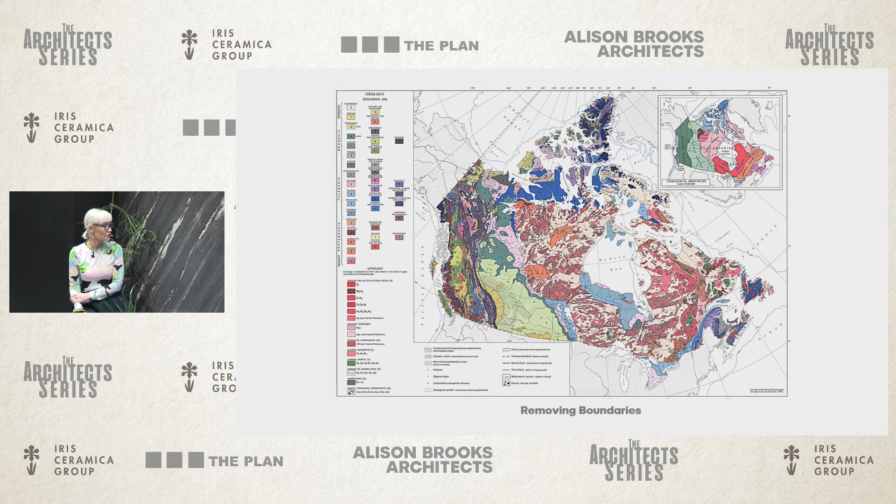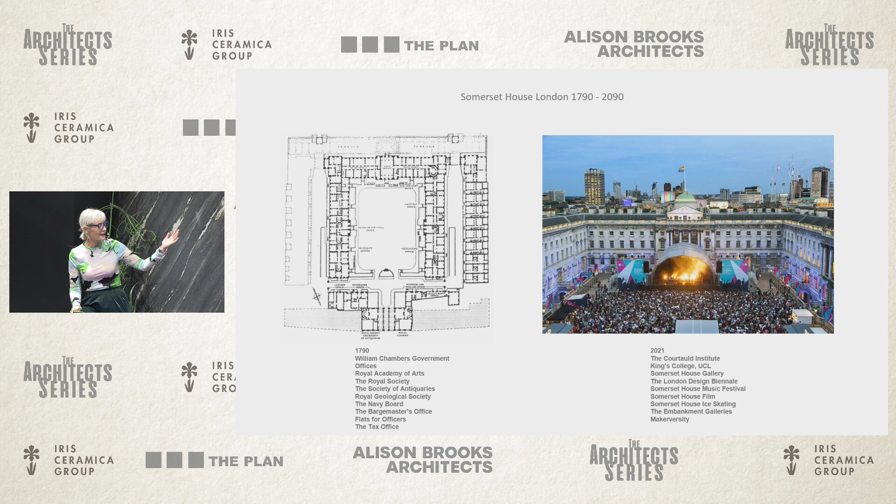So these kinds of places have informed and inspired me, kept me in London, places like Somerset House, which has evolved from 1790 to 2021. We held our office 21-year anniversary party at Somerset House - that's not the party, but it will be the party we have one day.

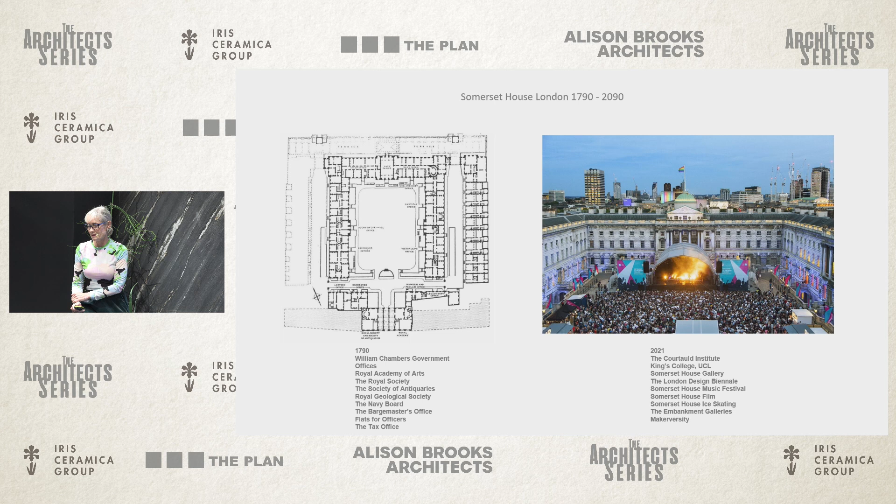That's the festival that they hold in the summer. But it's this kind of adaptable architecture that's generous, robust, and is loved, and is a kind of sustainability that we also need to aspire to.

So we published a book in 2017, Ideals Into Ideas, and this is also underpinning principles for the practice. We're aiming for authenticity, generosity, civicness, and beauty in all our work. These are, in a way, part of this wider project to respond to context, to bring our ideals to the table, and bring together memory with the future.

And I think that's, in a way, what the architect's role is: to tap into those meaningful experiences, tap into place, and bring it into the future. And this is also the notion that architecture should be about storytelling.

It's about making the stories and histories and collective memory of communities legible and visible. So as a practice, we really focus on four principal areas of design: master planning, buildings for education and the arts, housing, mixed-use urban developments, and then as a counterpoint, private houses that are a way of keeping our hand in on the real making of buildings.

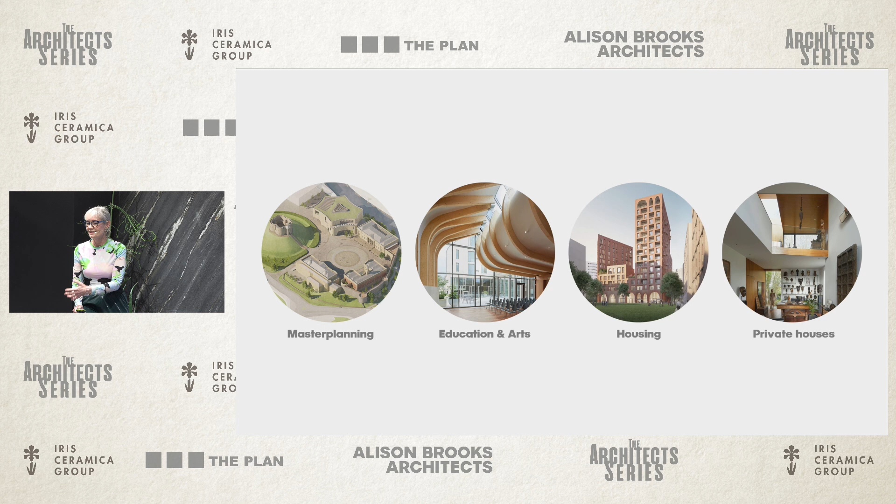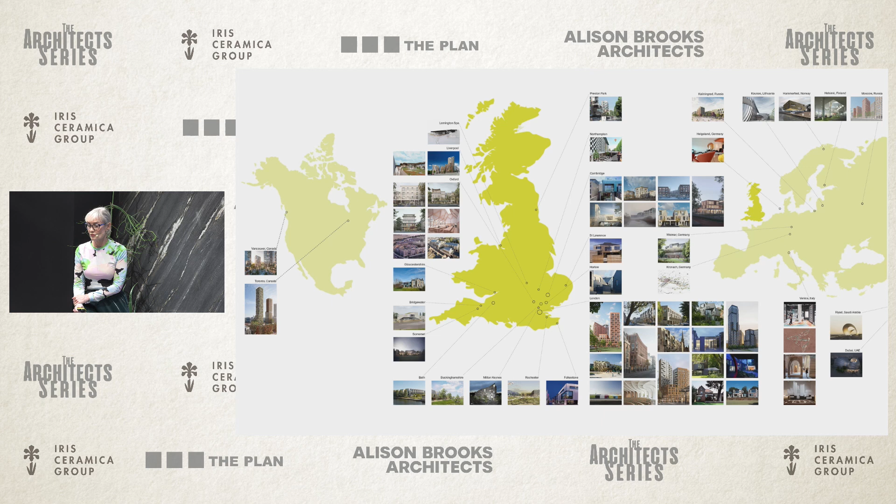Our work has spread over the years, so you can see it's primarily concentrated in the UK, but also a couple of projects in Canada. And as I mentioned earlier, we're working now in Taiwan, Sweden, and France, and it's really amazing to be able to experience these places and respond to them.

But the office is not just about work, it's also about a kind of practice culture, and we go on trips to places like the Venice Biennale or to the north of England, to Porto, Barcelona, Lille, and try to create that shared experience that informs our work and inspires us.

And we also exhibit, not only at the Venice Biennale, where we've exhibited four times, but also in other venues around the UK and Europe.

And we also have a sustainability working group in the office that actually develops all of our policies and targets, and tracks developing guidance in terms of sustainability policies, also from our clients.

And here you can see our ambition to basically reduce embodied carbon and operational carbon in line with, and exceeding, government targets up until 2040.

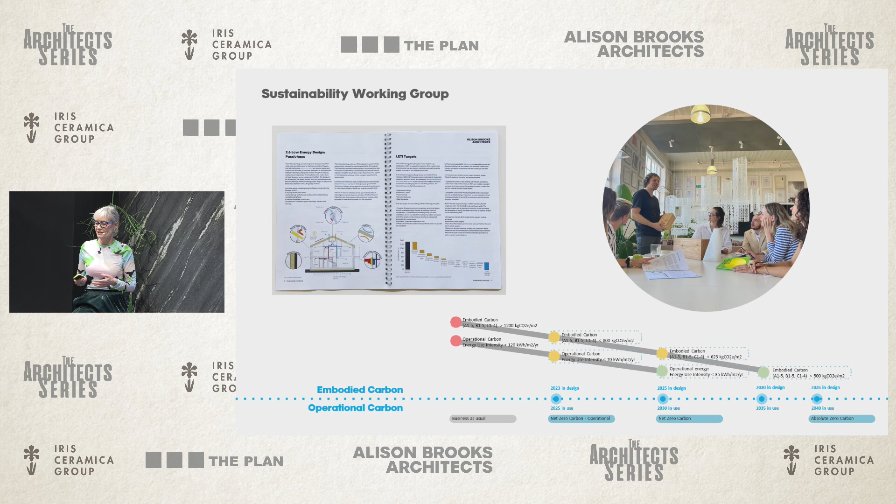But of course, we need our clients and society as a whole to go along with us. But it is now our duty, as I think all architects feel very strongly about at the moment.

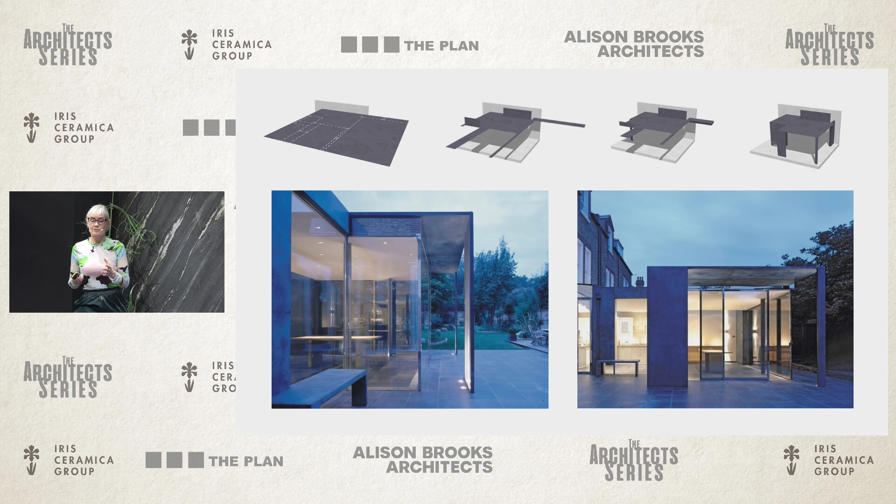So to go back a little bit farther in time into the origins of the work, of the practice, it's really this question that I had when I first started working with very small projects at the beginning of my practice in 1996, 97, and it was this question: what can architecture be?

Can architecture be just one material, like in the fold house? Can it be a single plane of metal that you cut and fold and it becomes a roof, it becomes structure, it becomes furniture, it becomes sunshades, trying to reduce it to its elements?

And that language kind of evolved into a more organic, non-orthogonal language that was more about evolving the bay window, a very familiar architectural element, into something more sculptural and plastic with the Lens House.

And then the Windward House, which was a sort of culmination of many years of working in this organic language. And the darkness of Windward House and its informal geometries were inspired by the Forest of Dean, trying to bring this quality of landscape into the experience of space.

But also make it a great place for the owners to cook and share the place with their friends, and also share it with their collection of tribal African and Indian art.

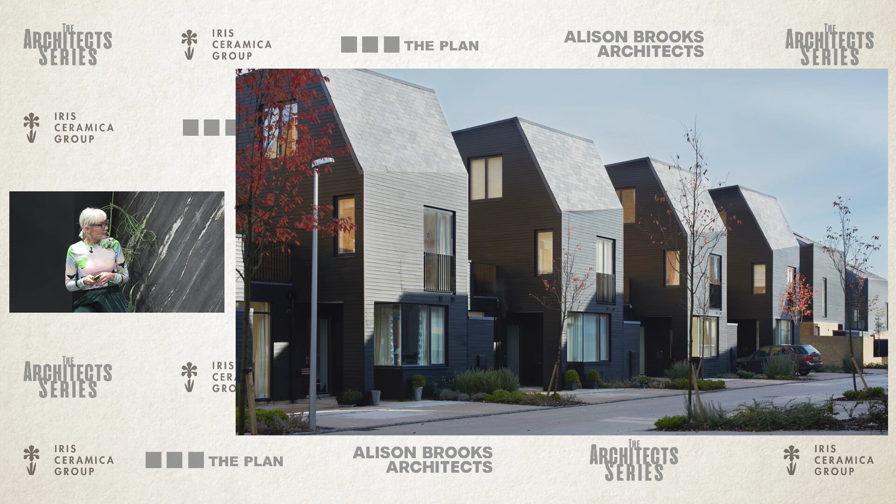And then I took those experiments in housing, in private houses, and tried to bring them into housing and even developer housing, house builder housing, and that's what Newhall Be was, a large-scale experiment where I was trying to make a sort of land art with housing, using those kind of organic geometries that I'd experimented with in houses.

So that project, in a way, leads to a more recent project that I've described as embracing global narratives. And this was the competition for the London School of Economics Global Hub and the Institute for Africa.

And it's here. The site is here. And we were shortlisted from, I think, 160 international submissions down to the final 5.

And this is a tricky problem because there is an existing building there, and it's very complex, very badly built, very low ceilings, not a great building. You can see from this image here.

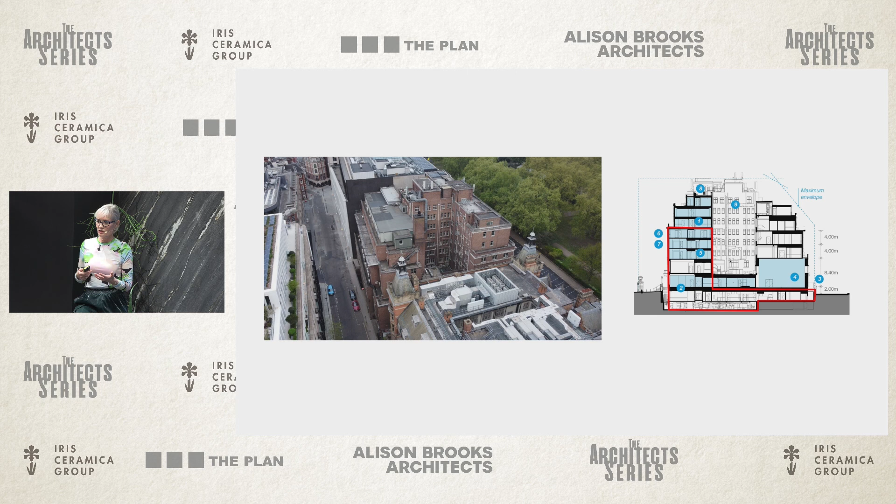And this project became the sort of crux of the debate about retention or demolition, and how much of buildings like this can you and should you save. But aside from that, there's also the kind of cultural project of the competition.

I felt that as an international institute and the global hub for Africa, we should really team with an African practice. So we invited Studio Contra from Lagos, Nigeria, to join our team, and we worked together on the scheme.

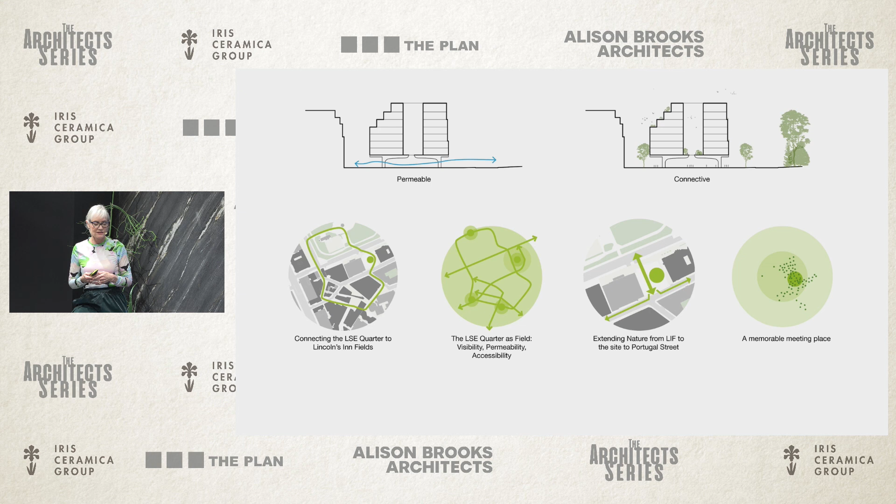It's a kind of urban design project, as most architecture is. It's about creating a new place of connection, making the LSE campus more permeable, extending nature through the site, lifting the building and making its public floors accessible.

This is a window into our process of modeling, with very strict rights of light envelopes and many different iterations in terms of how to create a fully naturally ventilated 60,000 square meter, very hardworking, multi-departmental building. In the bottom right, this stepped massing is what we arrived at.

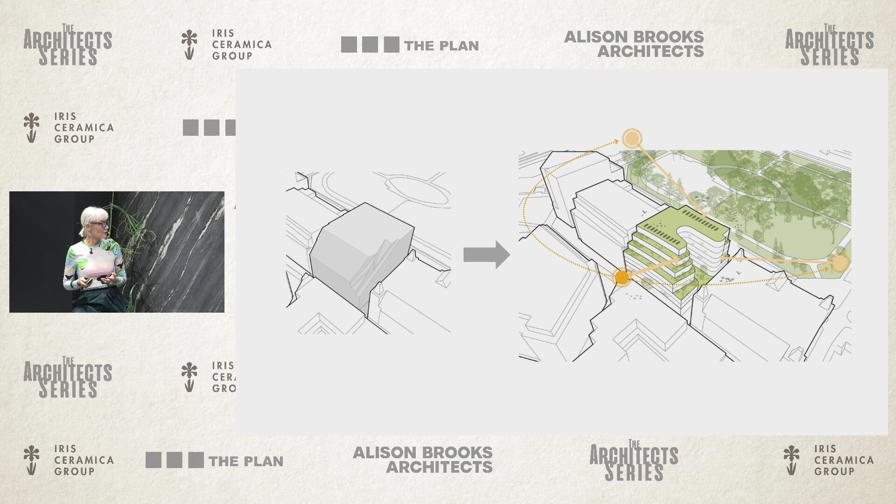The sustainability of this project was critical in terms of operational carbon and embodied carbon, with openable windows for every office. We also developed, one of the key elements of the brief, an agora - a publicly accessible forum for debate and performance that would be visible from the street.

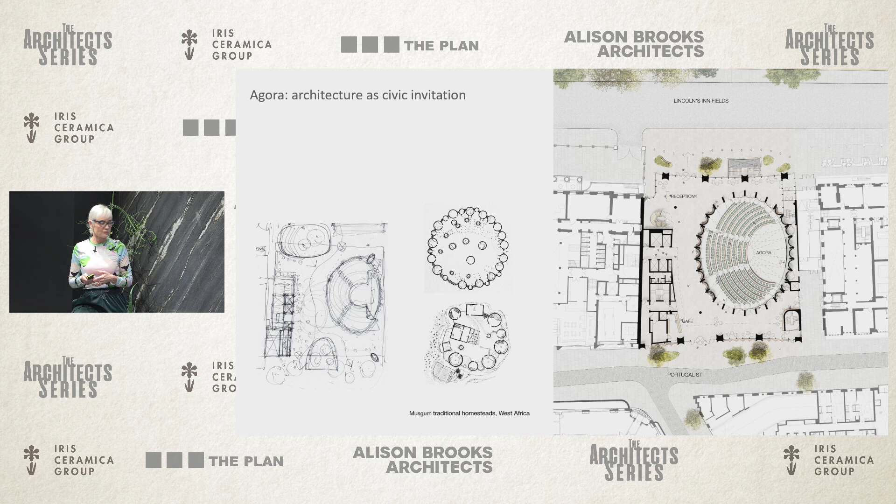Our agora, which is inevitably a long-span structure for 350 people, means you have to do a lot of work to the existing building, demolishing and rebuilding a lot. But our language, both for the gathering spaces, was inspired by West African traditional forms of gathering - the circle, clearly.

Our proposal involved creating this large span hall, this auditorium at the ground floor, using a courtyard structure to bring light and ventilation to the offices and the auditorium.

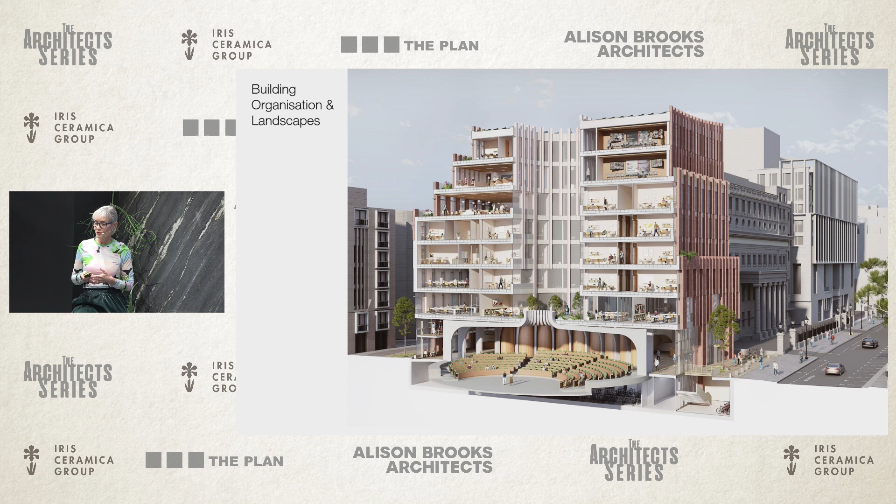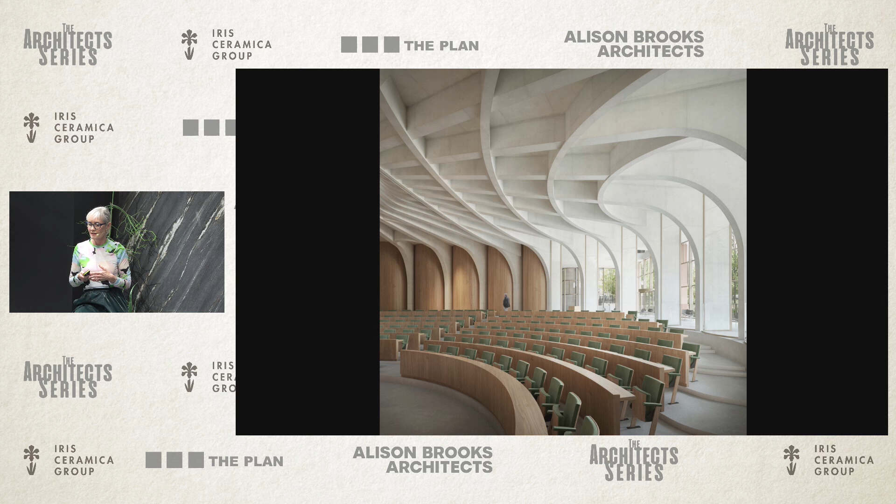Our intention was to create this space that would be both inviting - it could be opened or closed, creating an expressive structure that when open could be used by all the students and academics using the building, or it could be completely closed in like a UN-style auditorium, acoustically and environmentally separated.

In a way, our primary intention for this project was to bring a new language, new voices from Africa, from the global south, to the expression of a public building in one of London's major civic spaces. So the language we developed was really responding to the historic context of Lincoln's Inn Fields.

Of the Royal College of Surgeons next door - the color and texture, verticality, and even the chimneys. But we found in our research that traditional Hausa architecture, Iranian wind catchers, Musgum teleuks in Cameroon - there's a kind of shared language between African or vernaculars from the global south and a historic vernacular in London.

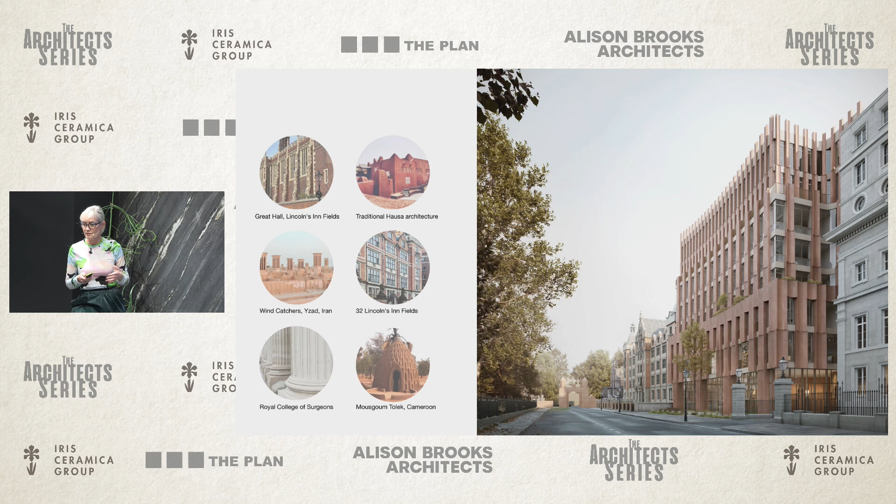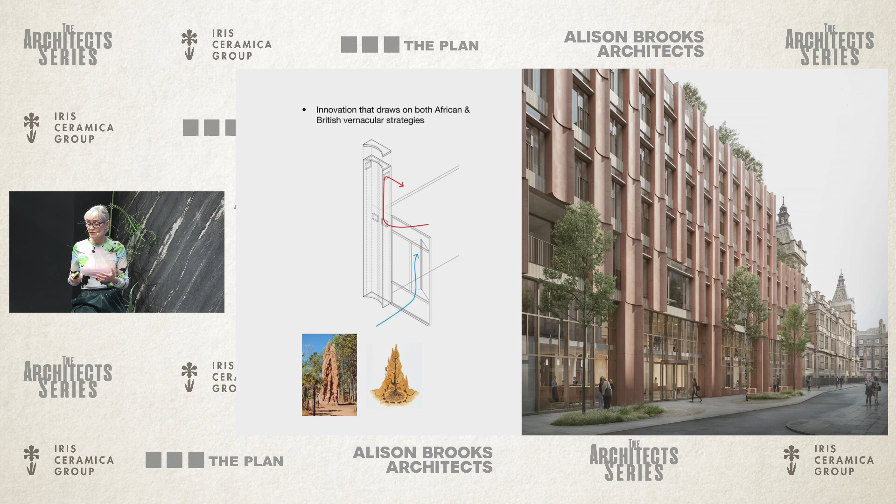This inspired our facade proposition, and this was also intended as a way of supporting the natural ventilation of each office by making the facade operate as thermal chimneys and shading devices.

This project, unfortunately, we didn't win. We were saving around 40% of the existing structure, but it went to the winner who preserved the existing building. I think what's important about this is it shows what our practice does in terms of research - we treat competitions as a form of design research, sustainability research, and it's all part of the conversation.

In the film we mentioned the idea of housing as civic building, and this is another mission we have - to really convince our clients who work in housing that housing is civic building, that it has a responsibility to the public, a condition of reciprocity.

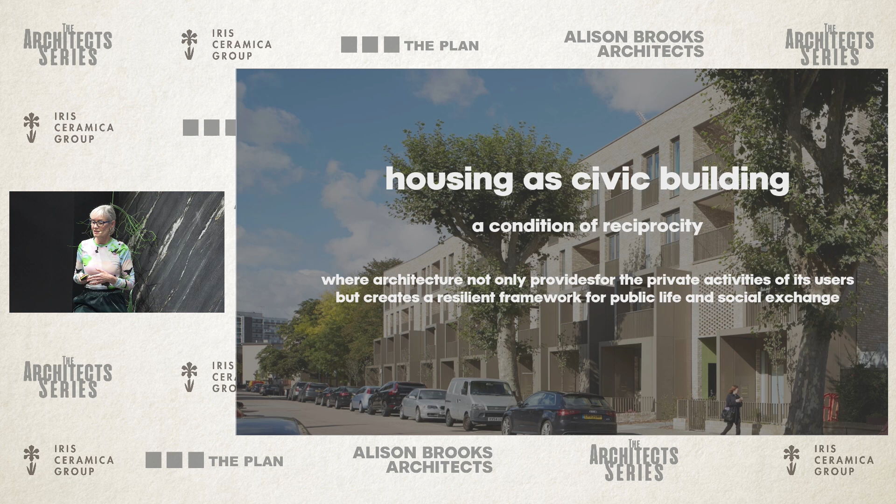You could say civicness is where architecture not only provides for the private activities of its users, but creates a resilient framework for public life and social exchange. So we've done many projects over the years.

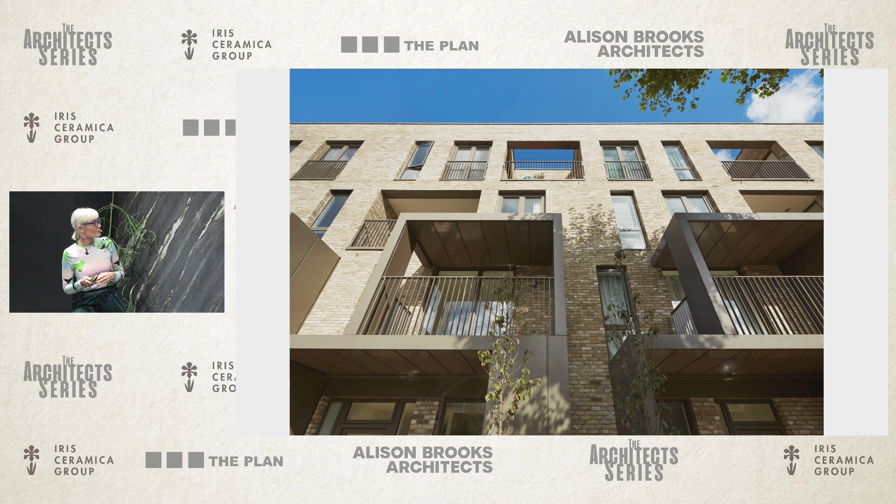This is estate regeneration work we did in the London Borough of Brent, restoring a former 1960s estate and a sort of abandoned land to a contemporary mansion block typology with verandas and deep inset balconies, landscape threshold spaces, and sheltered outdoor rooms to animate and create a social role for the facades.

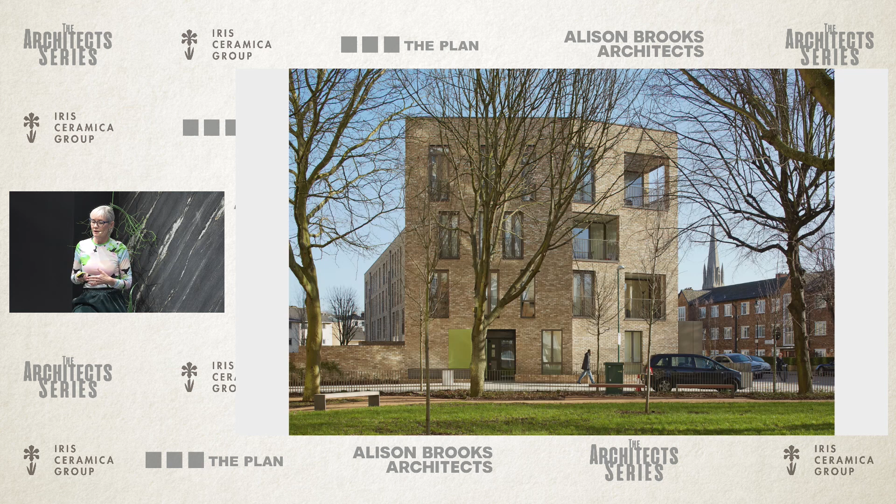You can see how it responds to the existing context and creates generous places in contrast to the bison block you can see in the distance there, which were really faulty buildings, oppressive, and symbols of the dysfunctional urban and architectural principles of the 1960s.

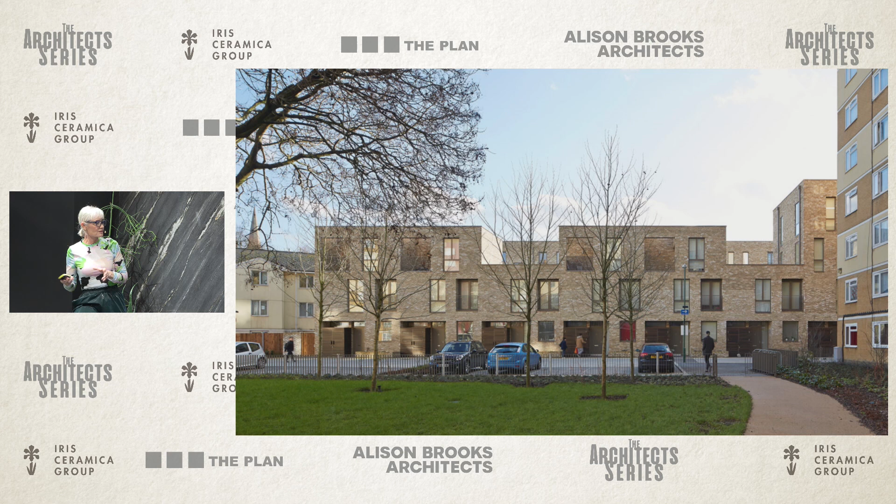But we stitched our scheme into the existing estate, and on the right you can see some of the buildings are being retained that are still performing well, creating this integration and mix of times and periods to create also shared public spaces. We exhibited this project in 2016 at the Venice Biennale.

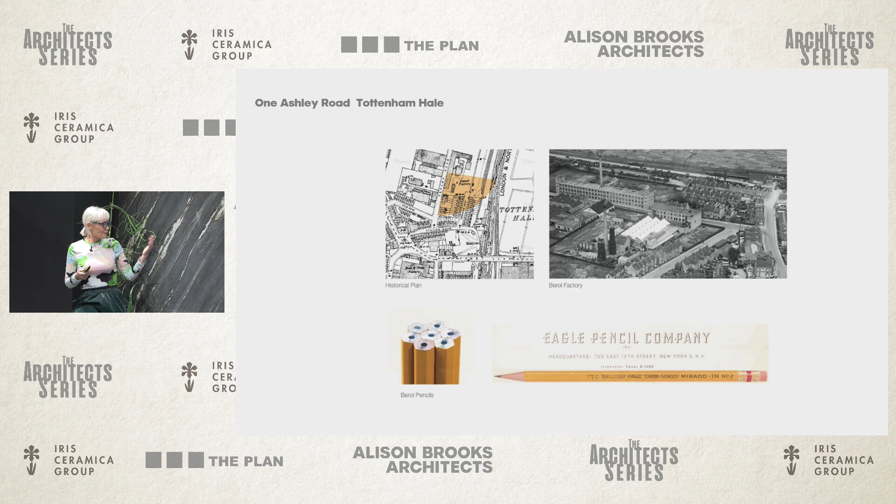We've just finished a project in Tottenham Hale called One Ashley Road, on the site of the former Berol pencil factory. Although most of the factory is gone, some of it still remains. We thought it would be interesting to draw on the iconography of the Berol pencil - the hexagonal plan form, the orange skin, the lead, the gray interior - and let that inspire the language for this building.

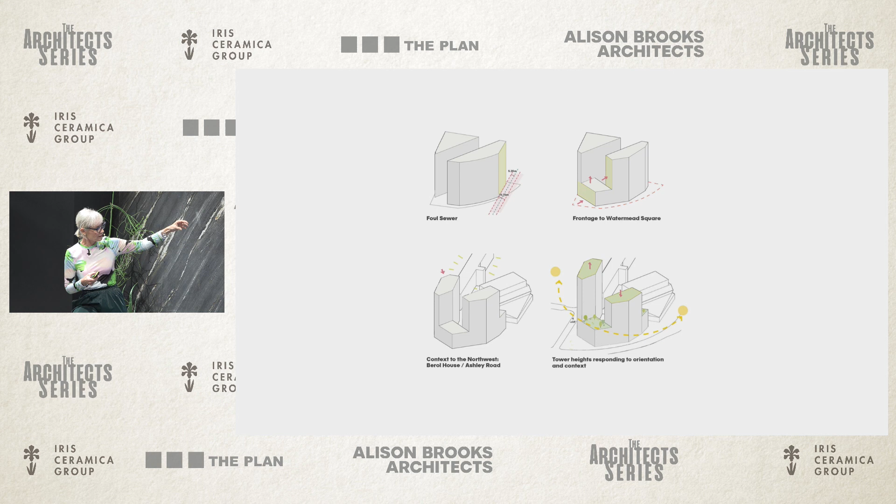It's also another project where we treat it as a kind of carving process, where the maximum developable mass is our starting point, and then we carve away where needed for spanning the Victoria line or bringing in light. We manipulate the volumes that emerge - this is another courtyard tower - to create an urban tableau with foreground and background and roof terraces, humanizing what could be a very dense cluster.

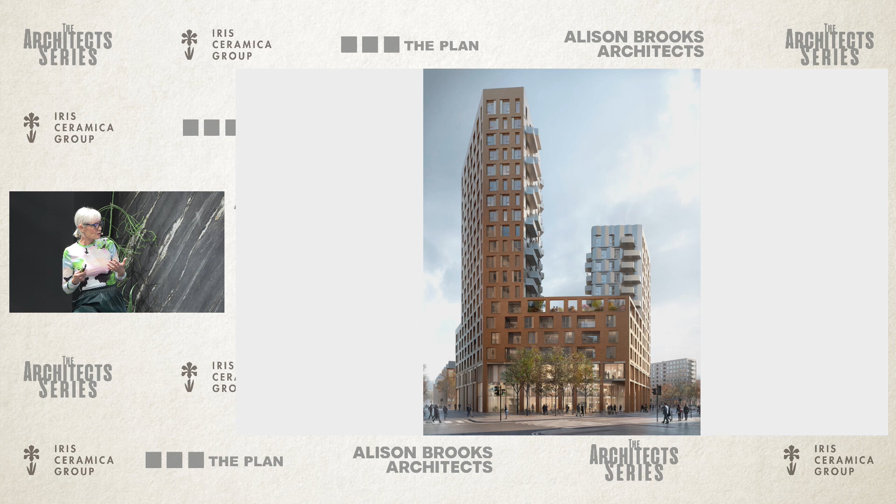This is the way it addresses and creates and frames a new public space, and there are residents' roof terraces on the interstitial garden levels.

Here you can see the inner skin, which is faceted and gray, with the outer skin in red brick, and patterned balconies that again build on the hexagonal geometries of the site.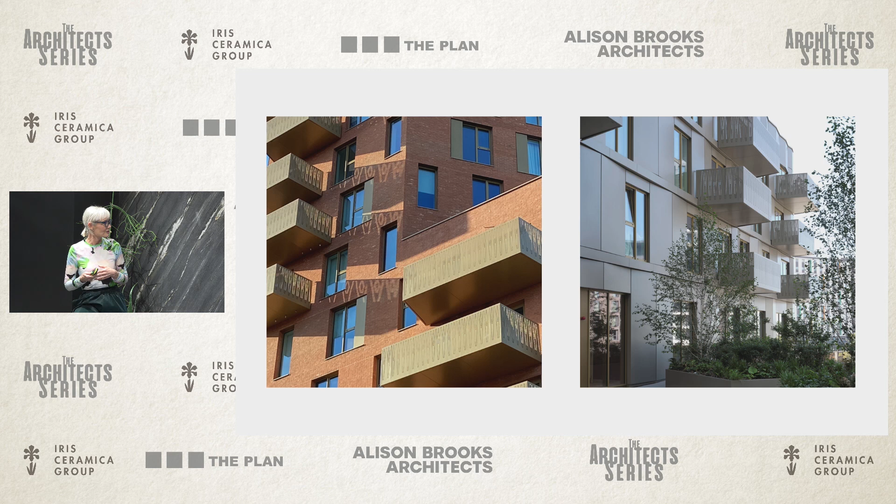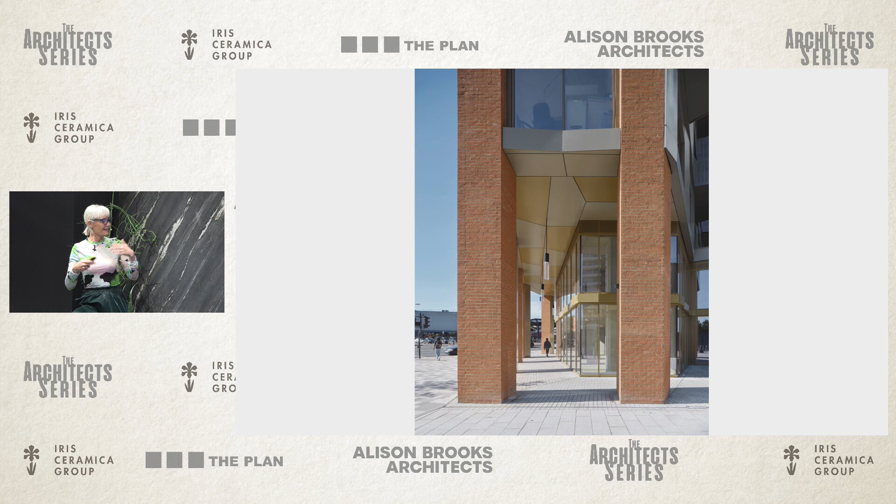These patterned balconies create shadows, a kind of patterned shadow - a sort of automatic ornamentation through light and shadow. We've also created a colonnade to filter the noise from the street and create a generous threshold space, a civic space that mediates the environment.

And here's the foyer, a triple height foyer.

Another project we're doing in East London is IQL, International Quarter in Stratford. This project is also about transforming the identity of a place. At the moment IQL is office-led, and Lend Lease, our client, wanted to turn it into a mixed-use neighborhood, introducing a residential element at the prow where it meets the Queen Elizabeth Park.

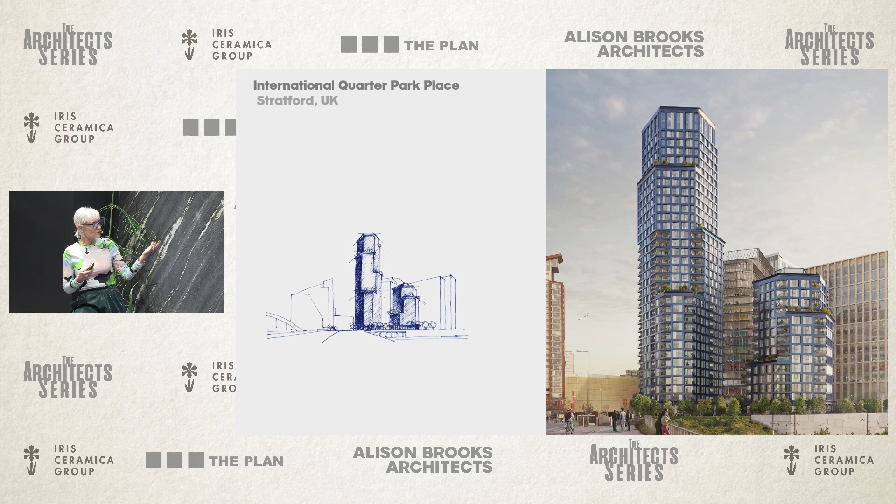Our idea was to work again with a hexagonal plan form, using rotations and stepping of the massing to bring nature up onto the higher levels of the building and create this generous colonnaded base, acting as a threshold from the park into IQL.

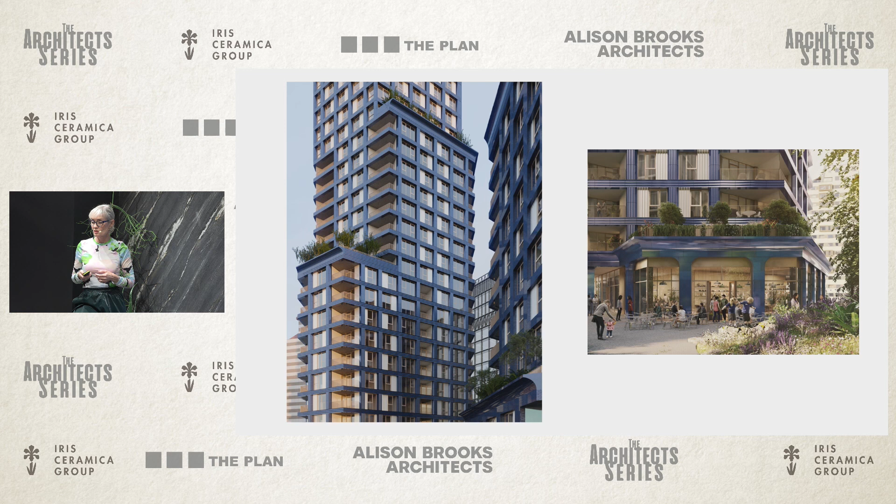This is the quality of landscape and the idea of immersing this new residential community in the park, bringing it closer into the way people will be living day to day.

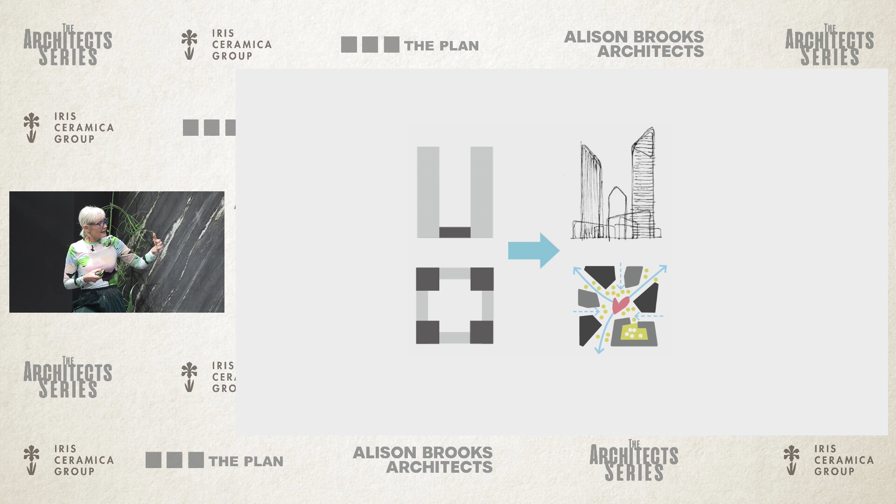Our proposal intentionally broke all the rules of development in Vancouver, which is generally the tower and townhouse model on the left that creates a sort of fortress of private space and kind of exclusion. We replaced it with a much more dispersed and permeable urban plan with six buildings that bring public space to the center of the site.

It's called The Passages, and you can see here the language we're working with to bring an organic and meandering relationship between the buildings, inviting the neighborhood into the center of the plan.

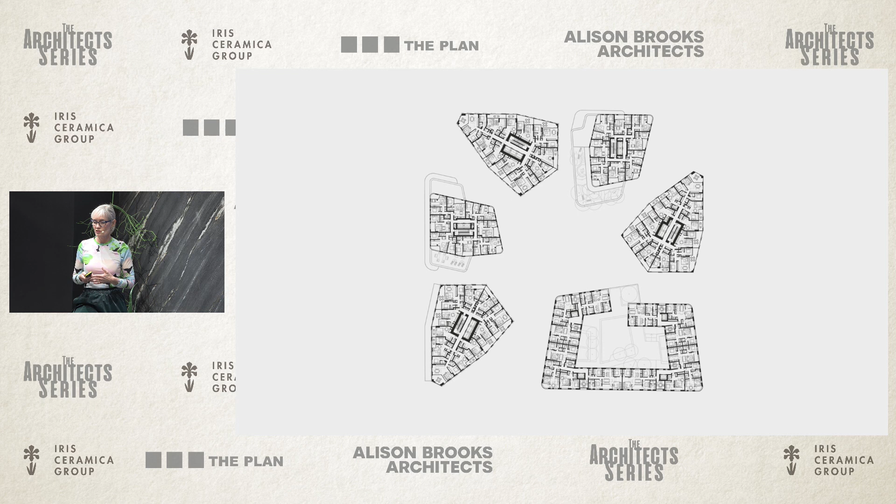The towers are very big in terms of their footprint, and they're working very hard, and we use this efficiency to pay for the generous public realm and public amenities distributed around all the ground and first floors.

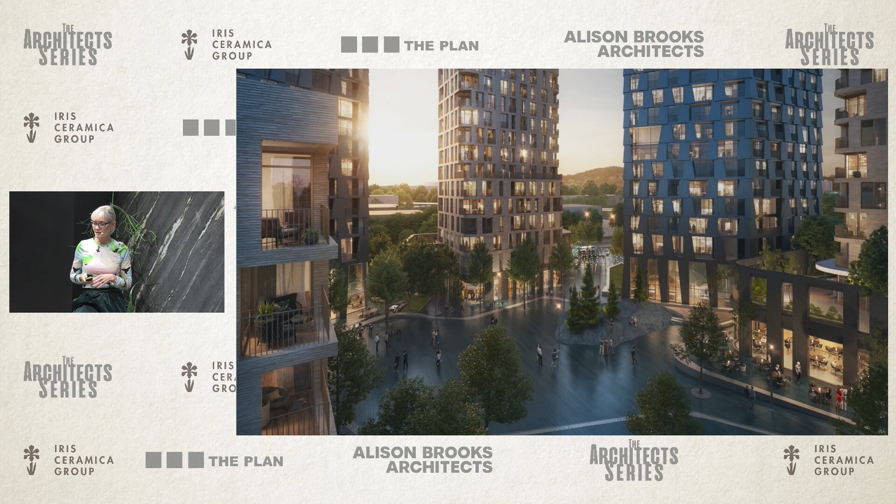This project was also inspired by the pine, fir, and cedar forests of BC, working with a language of shingles, bark, and a textured, shaded facade that is the opposite of the glassy towers of Vancouver. The public space at the center is about creating a particular identity of landscape that you could only find in BC.

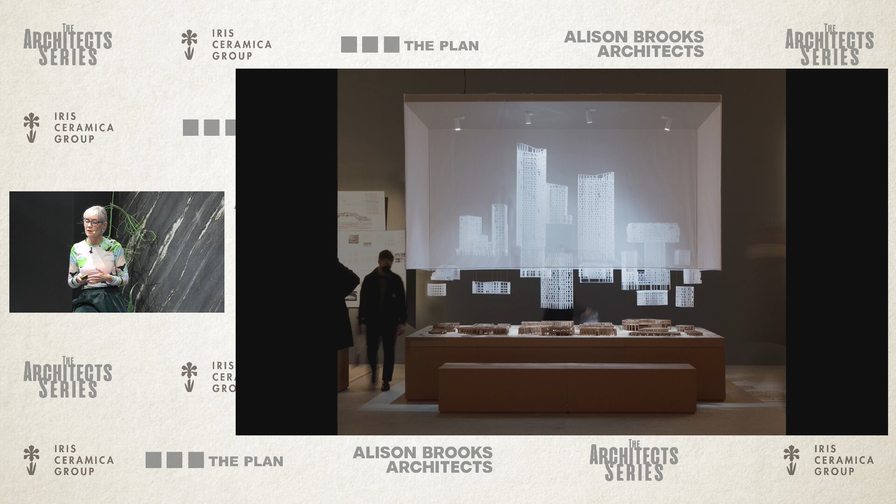All of these housing projects we brought together at the 2021 Venice Biennale in a project called Home Ground, where we gathered all of our housing projects and created a Campo Marzio, a shared space, exposing the ground floors of all our projects as part of the public realm, contributing to public life.

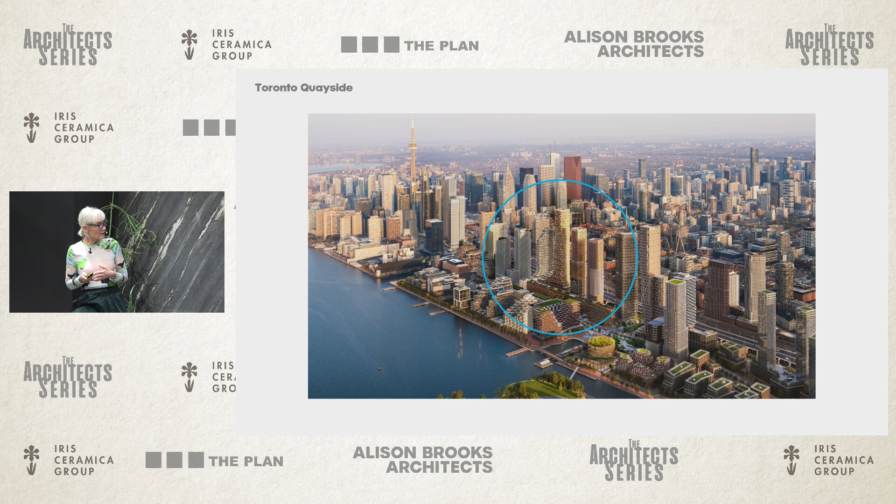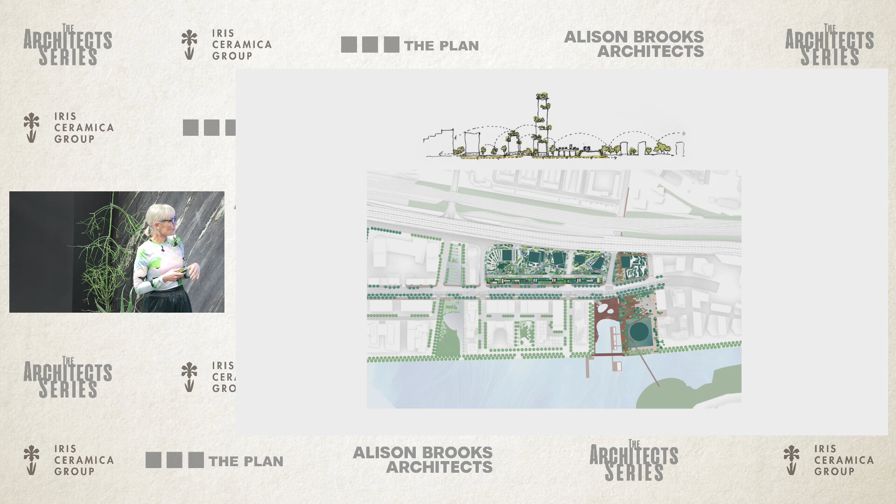The last big residential project I'll show is in Toronto—Quayside, a master plan we won in an international competition with two other practices. The idea was to bring nature to the waterfront, which is Lake Ontario and Toronto's waterfront, but there's a huge barrier formed by the Gardiner Expressway, Lakeshore Boulevard, and the Trans-Canada Railway at the north end of the site.

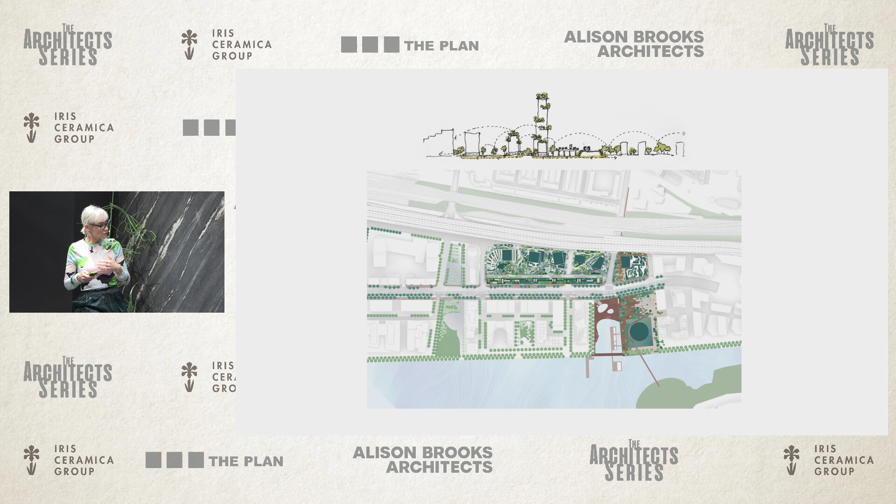Our idea was to enable nature to leapfrog these barriers and use the buildings as a kind of staging post to reconnect to the waterfront and kickstart a new waterfront ecology. These diagrams show our building—we're at phase 1, with phase 2 and phase 3 to follow, probably far into the future.

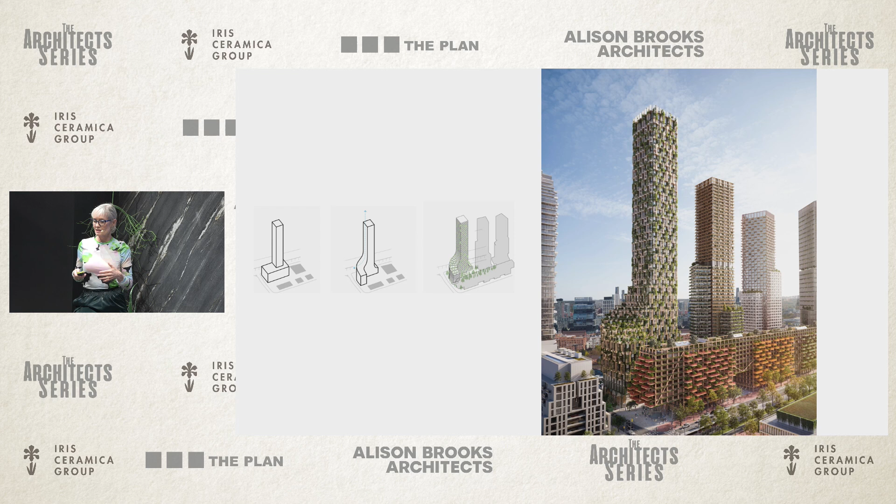Our idea for phase 1 was to rethink the tower-podium model typical in North America, integrating them into a single form with a curved plan—pulling the tower from a curved base that forms a sheltering courtyard and public space, then enveloping the tower with balconies and trellises, a facade where residents could grow significant numbers of plants, since the balconies are generally two stories high, allowing for small trees, shrubs, and climbers.

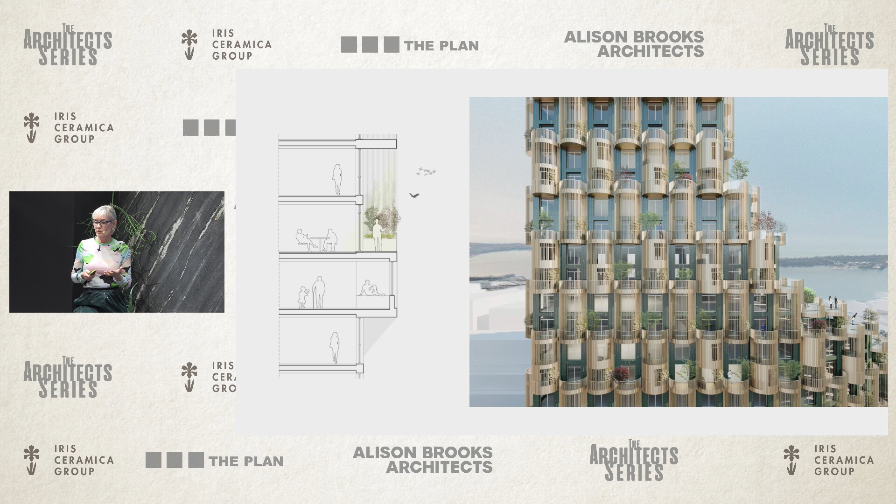The whole facade becomes a host for insects, birds, and plants, creating the opportunity for residents to be serious about creating a super-tall building—69 stories—that's a host for nature. It's also clad in green ceramic tile.

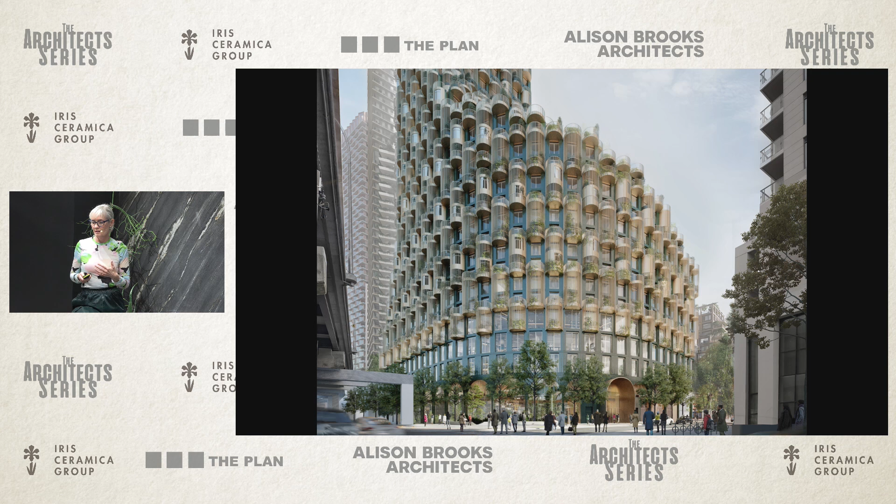The building at IQL is blue ceramic tile, drawing on the history of porcelain works in Stratford. These green ceramic tiles bring solidity and draw on the historic tradition of beautiful terracotta facades in Toronto from the 19th century. The building also has to work in winter, and we acknowledge plants don't grow in winter unless evergreen, so it's about creating shade, privacy, and shelter, as well as places for growth.

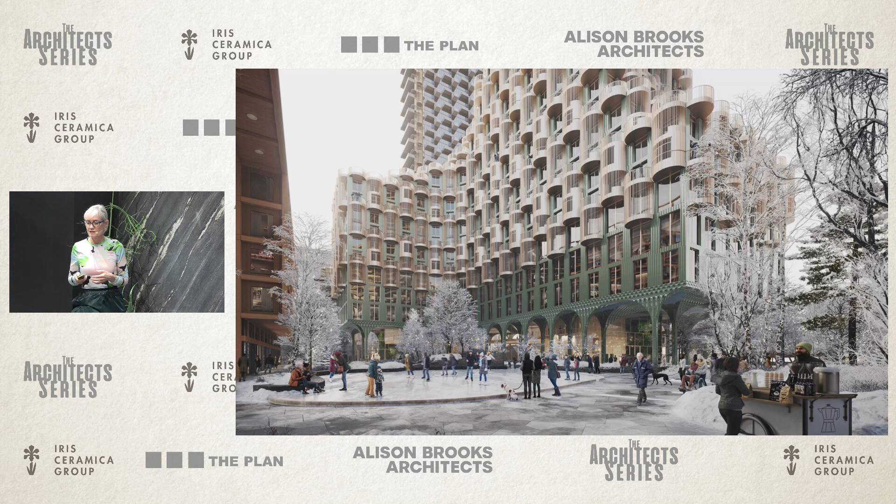On reinventing archetypes—you saw the film on Cohen Quad, which covers it extensively, but it's worth reiterating key principles that speak to sustainability and longevity. Oxford is a city made of university buildings that are quads, and each quad is a college, and each college is a community. The architecture of these quadrangles directly translates community into built form.

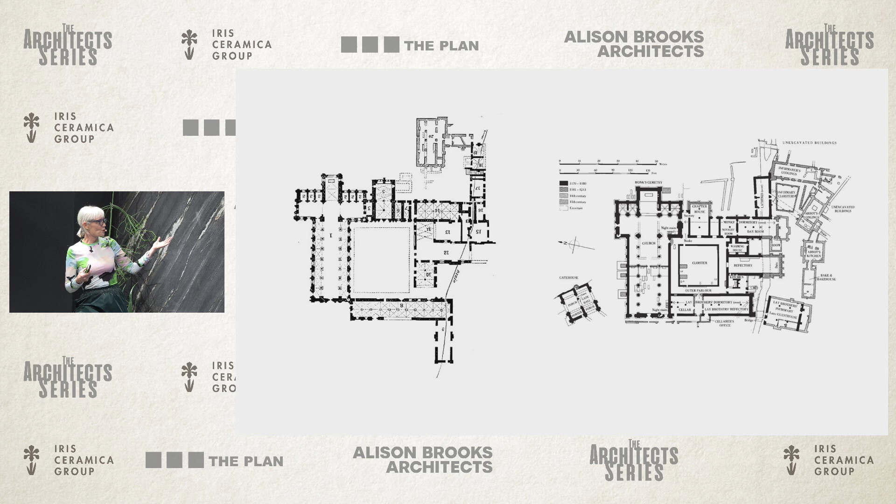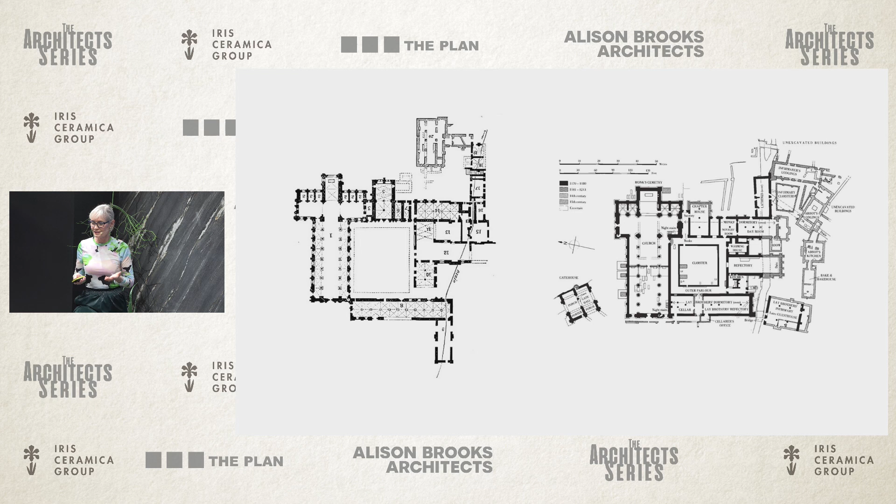This springs from the monastic tradition of a community living, working, studying, and worshiping together in a multi-purpose, self-sustaining compound—the abbey or monastery. This tradition evolved and became the basis of all the ancient universities, and this is Exeter College's first iteration as a compilation or composite framework for communal study and living.

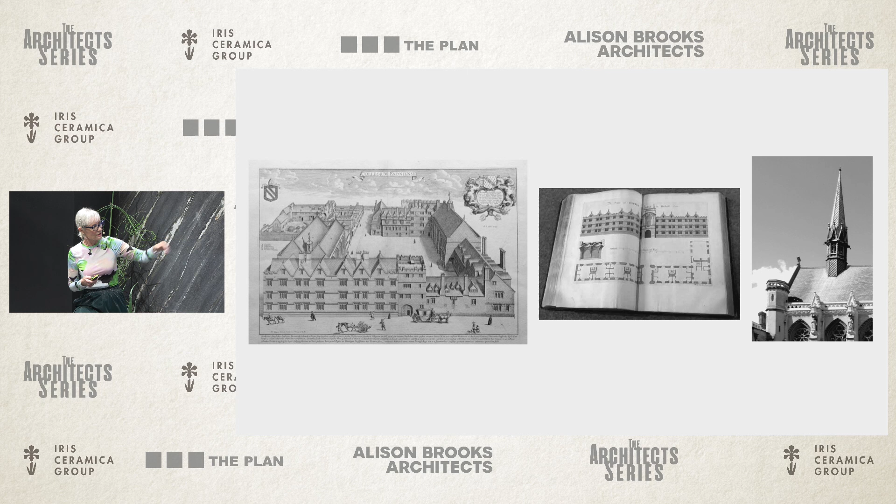And some of our research into the typologies when we were doing the competition, and then the wonderful neo-Gothic chapel by George Gilbert Scott that inspired the diagonal patterning of the roof, the diagonal lattice of the tower. But of course, we had to translate this ancient kind of model, and the brief was to bring a contemporary language and identity to the quad and to the collegiate tradition.

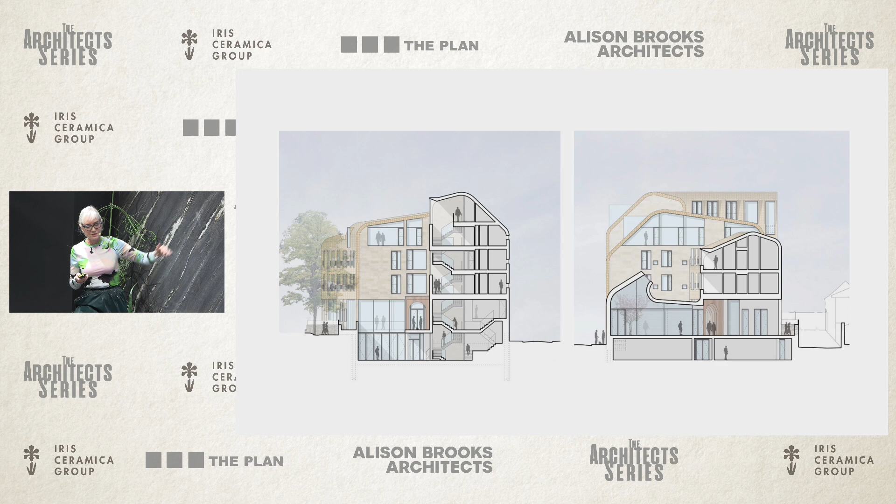This section just shows how, in a way, we disguised a 6-story building within a 3-story envelope using the mansard roof as a way of getting extra volume and extra space, and how the curved roof language steps down to create a kind of friend for the neighboring 2-story houses.

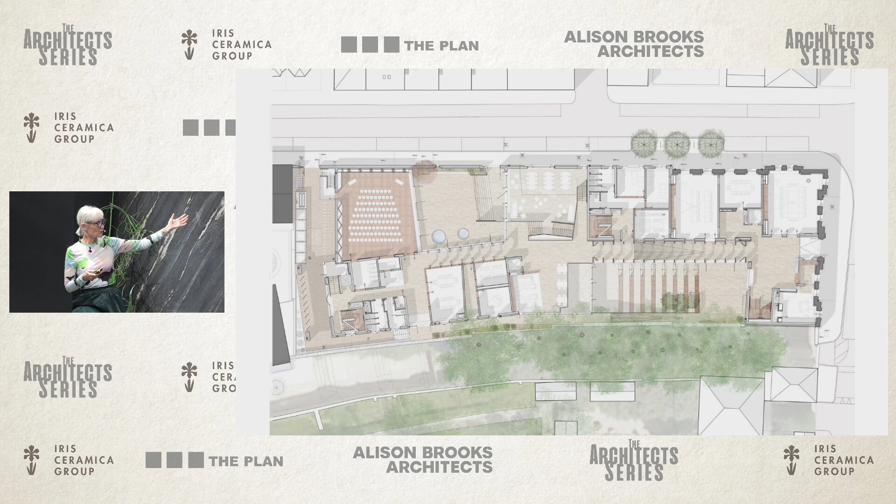And in a way, the density of the plan is what I wanted to speak about, that the density of uses in this building is so intense to a certain extent. Not only is it this S-shaped quad that weaves around 2 courtyards with teaching spaces and performance and auditoria, amphitheater, learning commons at the center, but it also has 90 student rooms. So it's about a community living and studying together, and it's also open to the public with this sort of crossroads, this 3-dimensional crossroads, which is the learning commons at the center.

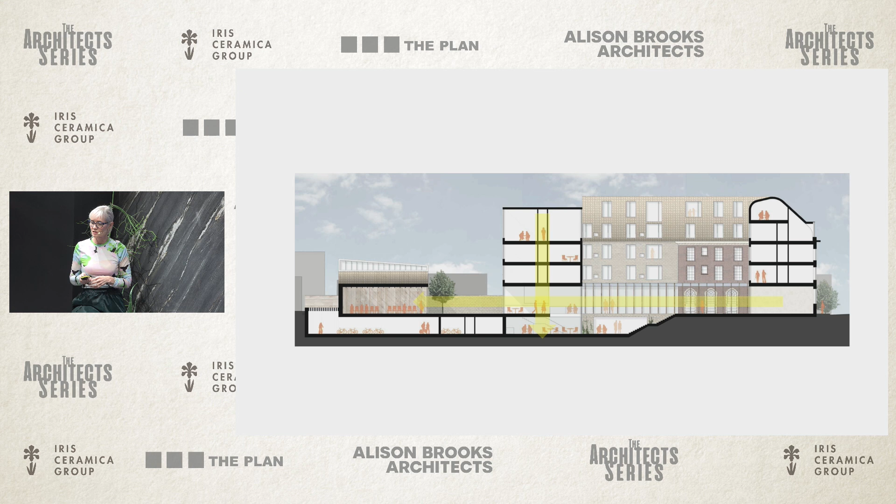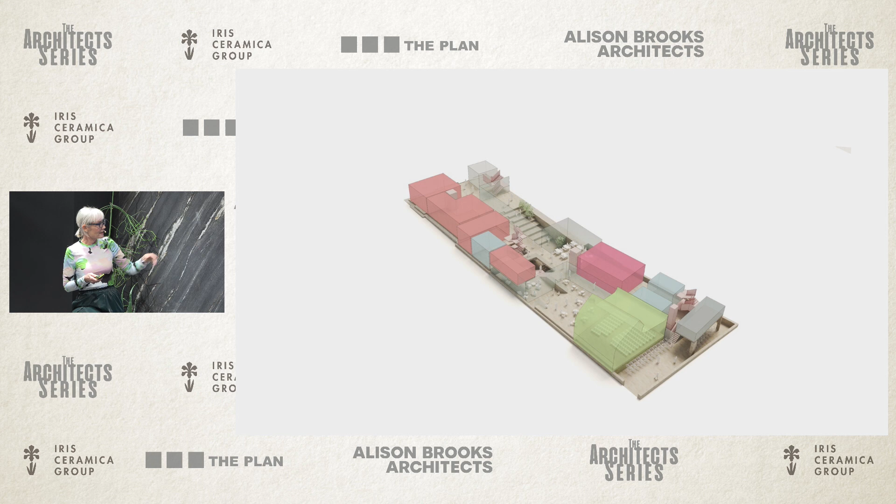So we excavated a full basement where the lower levels of the learning commons are, all the service spaces, a library, a BS 5454 archive, and then on the ground floor, the teaching spaces and auditoria and cafe and more learning commons, and then student rooms in turquoise, family kitchens at the center, more student rooms, and fellows rooms, and teaching studies, and research offices and teaching spaces under the roof.

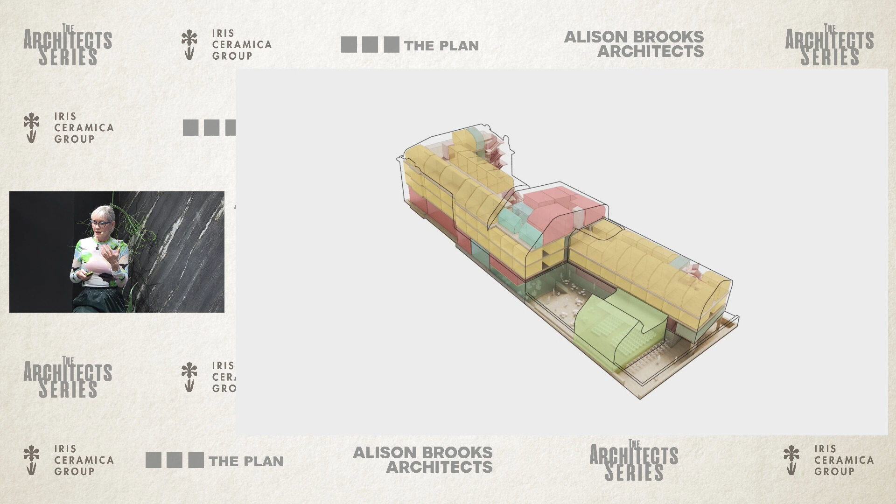So this kind of packing of really dense programs into a single building was a way, first of all, of optimizing the site, but in a way, ensured that it would be generous, it ensured it would be a piece of the academic fabric, not just student halls, and also bring a new identity to this community that was inspired by that monastic tradition.

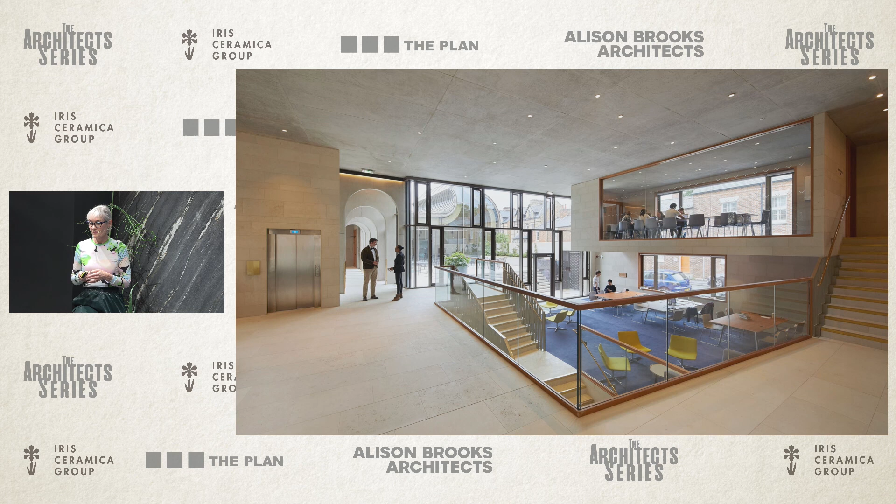And this sort of journey through the learning commons, you can see the kind of open, informal study spaces that the building offers, the thermal mass of the concrete that keeps it cool, naturally ventilated, and just the adaptability of these spaces that have multiple uses, and every time we go there, they change them. The college changes how they're set up in terms of furniture.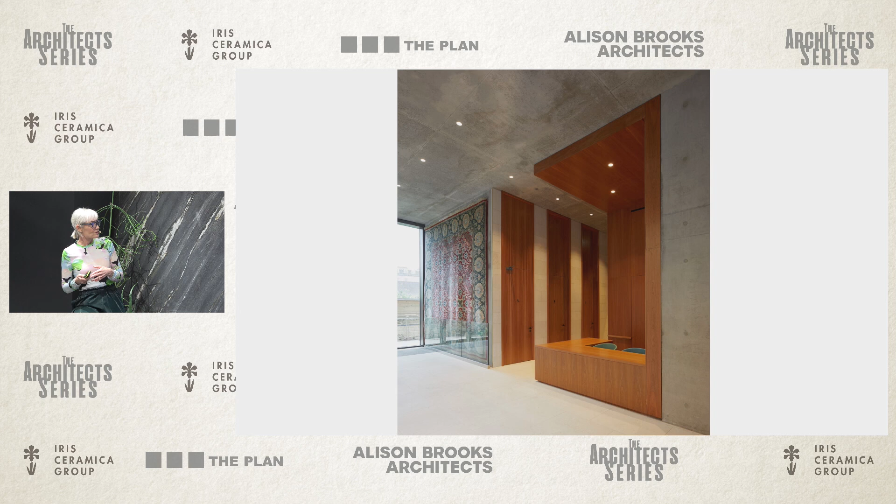We also thought of it as like a big house, a big, generous house where students could go up to the roof and study in common rooms, out on the roof terrace where you have this view across Oxford, and a kind of new language, a softened language that becomes a kind of new landscape as well as a roofscape in Oxford.

So this was the kind of paradigm shift that we were trying to achieve, from the ecclesiastical model to a more open and inclusive and welcoming home for a community, and that also contributes to this urban context of Oxford in a positive way, as a building on the edge of the academic centre.

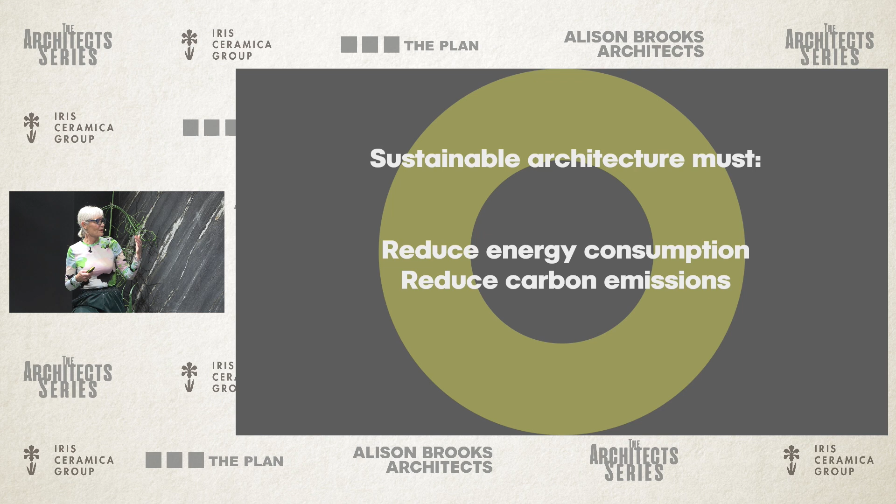So in conclusion, I just wanted to end with some points about sustainability, because we are all so embedded in the technicalities and the science of producing sustainable architecture. But we know we must reduce energy consumption, we must reduce carbon emissions, but we also must enable emotions with our architecture, such as attachment, such as belonging to place, and connecting to nature. So let's make better contexts for humans and nature. Thank you.